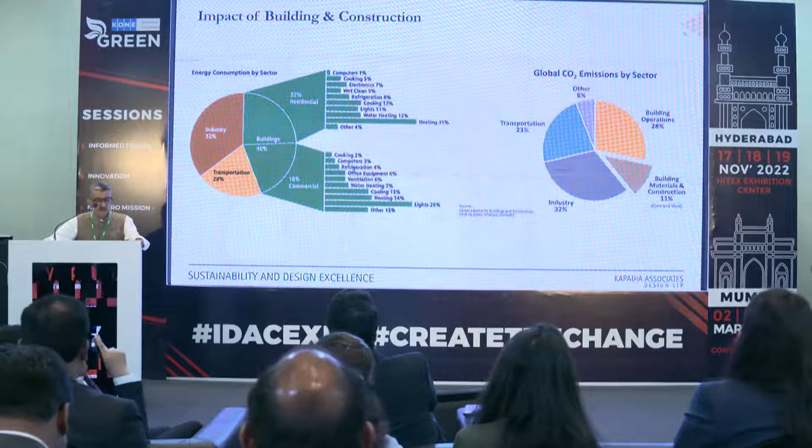The world today is facing broad and complex challenges that threaten every aspect of our lives. As the effects of climate change intensify across the world, the architecture, engineering, and construction industry, AEC as it's popularly called, is getting extremely aware of the looming crisis. Let me start with some statistics. You'll be surprised to know that the building and construction sector is responsible for approximately 40% of energy consumption.

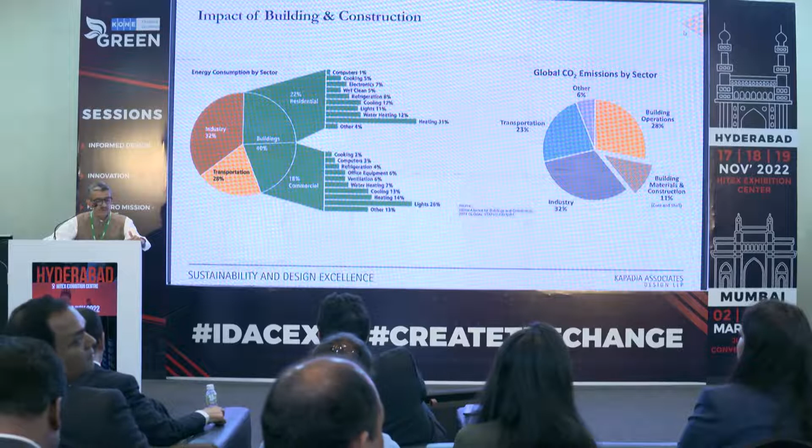39% of energy related carbon emissions, and 50% of resource consumption globally. Over the years these figures are only going to increase, and growing economies like India will contribute significantly to this environmental crisis. Many government organizations and climate conscious bodies are pushing for all new buildings and developments to achieve carbon neutrality by 2040. Architects, engineers, and all agencies involved in the building industry must begin implementing sustainable strategies into their workflows to achieve this goal.

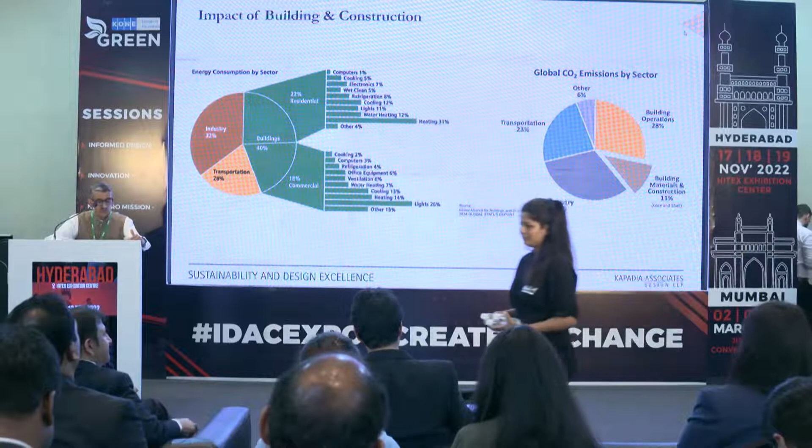There was a time not long ago - I've been practicing now for about 30 years - when the goal of the sustainability movement was to create awareness amongst people that a problem exists. Those days are definitely behind us. Today a majority of the population, and I'm not talking just about architects, the general population, politicians, etc., understand global problems such as climate change, air pollution, exposure to environmental toxins that threaten our future.

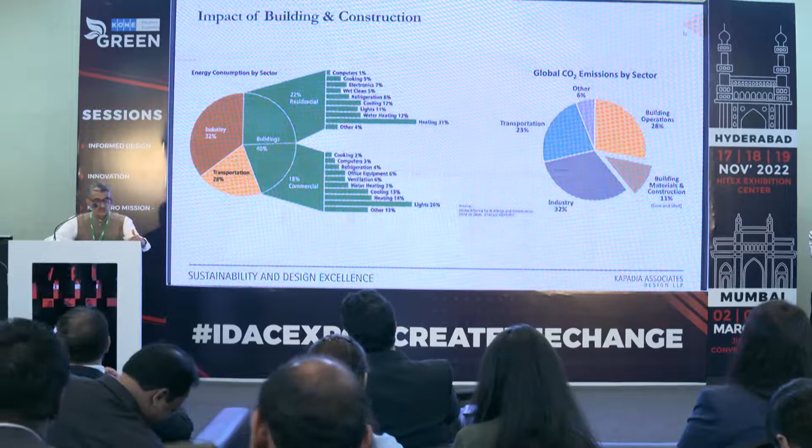Architects also understand that the built environment plays a significant role as both a cause of many problems, and we have to find the solution to the problems we have in a certain way created. More professionals see sustainable design as a major component of good design and want to improve the social, environmental, and long-term economic performance of projects. The problem most architects face is not a lack of concern or intent, but the ability to achieve deeply sustainable projects amongst a myriad of competing priorities.

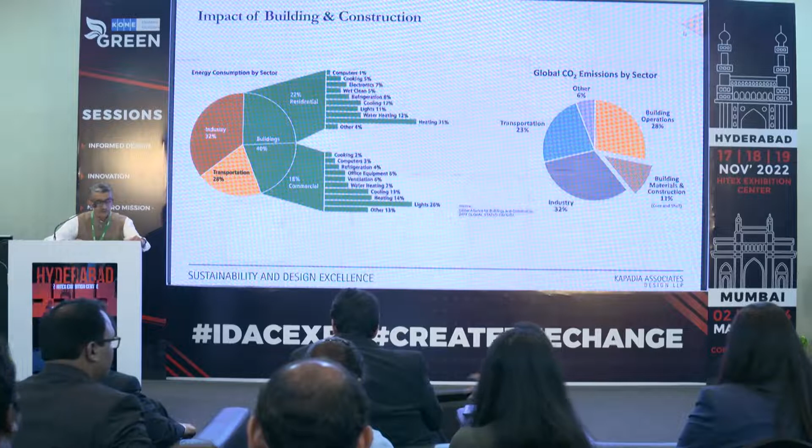High performance buildings are often seen as something available only to a few ambitious projects, which have the right client, the right program, and the right budget. These are showcase projects as I see them, and I want to change the bar here. These high performing buildings are definitely important as examples of what is possible and for pushing the envelope, but they are few and far between. They will not solve the big environmental issues.

Furthermore, the emphasis in our country is to do with rating systems, like what Carl said. Standardized rating systems like USGBC, LEED, GRIHA have a role to play as they streamline sustainability for quick adoption in a project. However, these rating systems do not look at the design process in a holistic manner, and that's my biggest peeve about them. This often results in piecemeal, incremental changes to the design that are invisible to the user in terms of tangible benefits. People are chasing ratings but not really getting or seeing the benefits of it - it's not deeply ingrained. They also add a significant administrative burden to an already overtaxed design administration, which discourages clients from adopting them.

So a lot of buildings where we're doing a lot of the green principles, but clients do not want to go in for a rating purely because the administrative issues of dealing with rating are quite significant, and they don't really want to deal with that.

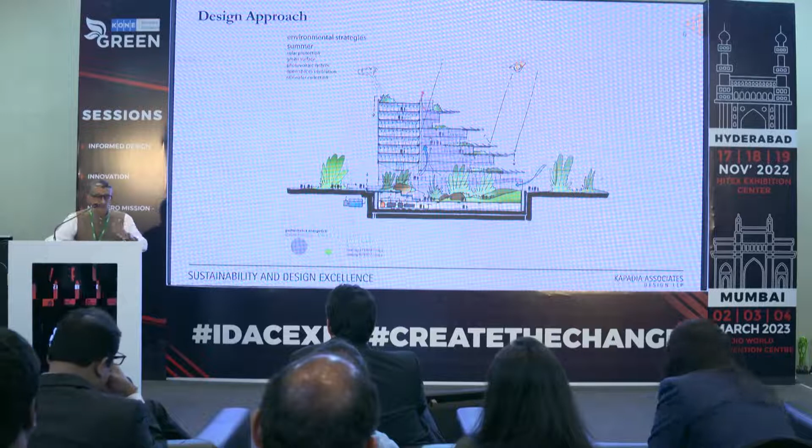For example, one rating system very popular in the West is called WELL, W-E-L-L, which actually looks at the health and well-being of the inhabitants. Rating systems like Griha or LEED don't look at wellness as a very major factor. So all rating systems have their own biases, which they push after. I think what is required here is a more holistic approach.

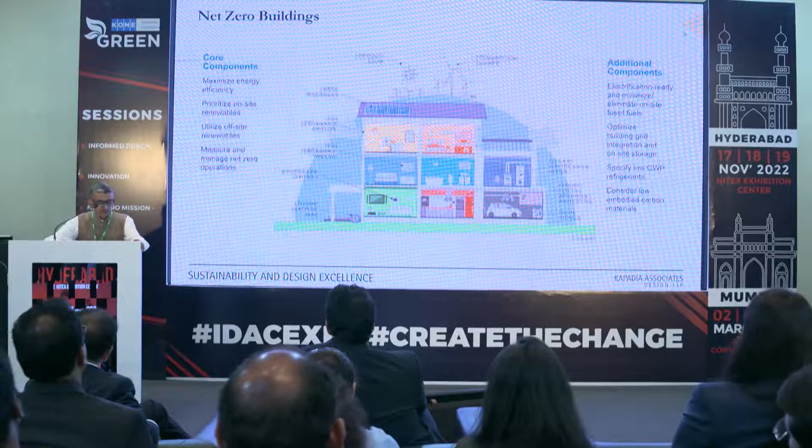And the architect's call to protect health, safety, and the welfare of its occupants has a new and broader meaning amid challenges such as increasing climate extremes and social inequity. Architects must recognize that our profession can harness the power of design to contribute to solutions addressing the most significant needs of our time. Building professionals should look at this as a big opportunity. Every project should be used as a platform for addressing big problems and provide creative solutions.

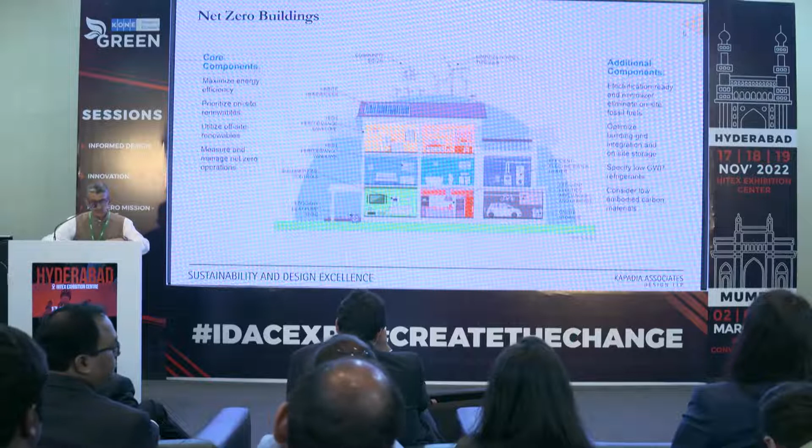I would like to introduce you to a framework for design excellence, which has been developed by international scholars and practitioners. The framework is comprised of 10 defining principles of good design in the 21st century. This framework seeks to inform progress towards a low energy, low carbon, equitable, resilient, and healthy built environment.

As a practice, we have been working with these principles over the last 3 years and have found them immensely helpful. This becomes a checklist for us when we do any kind of project, and I'll run you through each of these 10 principles that should be followed as general rules. These should be thoughtfully considered by the design community at the initiation of every project and incorporated into the design process from an early stage, regardless of the size, typology, or aspiration.

So the 10 are: design for integration, design for equitable communities, design for ecology, design for water, design for economy, design for energy, design for wellness, design for resources, design for change, and design for discovery. I will now briefly discuss each of these principles and focus points that each principle attempts to address.

The first one is design for integration. Good design elevates any project, no matter how small, with a thoughtful process that delivers both aesthetics and functionality in a mature balance. It is the element that binds all the principles together with the big idea. What is the concept or purpose behind the project, the design agenda as I would call it, and how will the priorities with the 9 other principles inform the project?

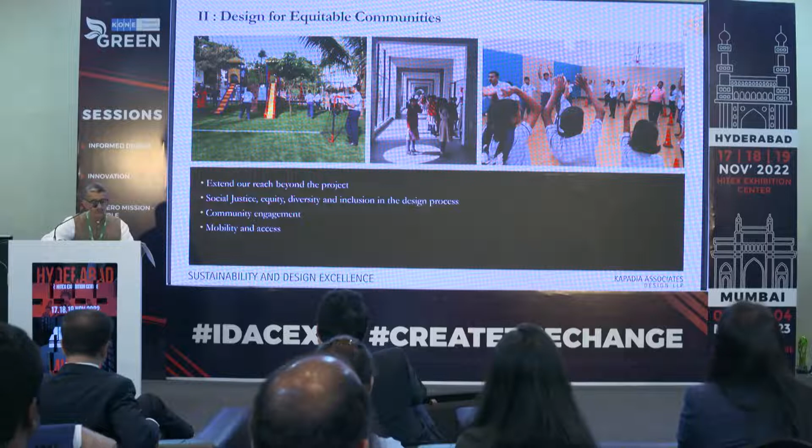The second is design for equitable communities. Design solutions affect more than the client and the final occupants. Good design positively impacts future occupants and the larger community. How can the design process remove barriers and promote inclusion and social equity, particularly with respect to vulnerable communities? What is the project's greater reach? How could this project contribute to create a diverse, accessible, walkable, just, and human-scaled community?

What might this project be forgetting? How can the project design process and outcome remove barriers and promote inclusion and social equity? What opportunities exist in the project to include, engage, and promote human connection? How can the design support health and resilience for the community during times of need and emergencies, as we've seen in the current COVID crisis?

The next principle is design for ecology. Good design mutually benefits humans and non-human inhabitants. How can the design support ecological health of its place over time? How can the design build resilience and support regional habitat restoration? How can the design help users become more aware and connected with regional ecosystems? How is the project supporting regional habitat restoration? This includes designing landscape composed of 100% native planting, especially species that attract pollinators.

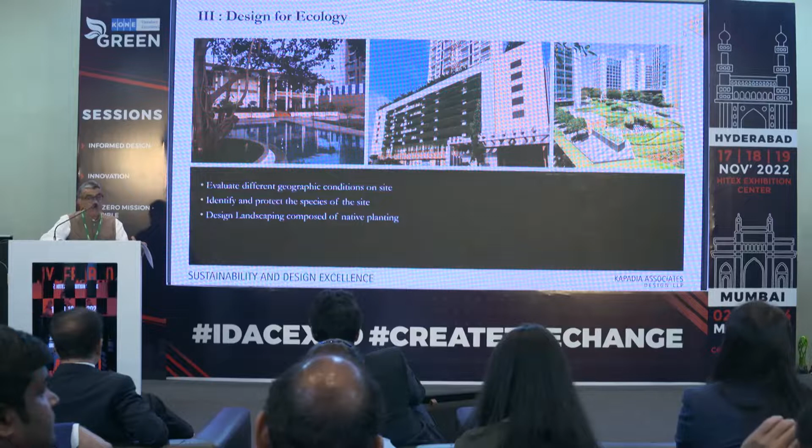The next issue is design for water. Good design conserves water and improves the quality of water as a precious resource. Does the project use water wisely, addressing both efficiency and consumption? How can the project's water systems maintain function during emergencies or disruptions? How does the project handle rainfall and stormwater responsibly? How does a project contribute to a healthy regional watershed? And there should be a sincere attempt to do a net zero water building.

A lot of scholars have said that the next war in the world is going to be fought over water. Water is going to be a precious resource. We're kind of harping a lot on energy, but water is going to be a very, very critical component of what we do.

The next is design for economy. Good design adds value for owners, occupants, and community, regardless of project size and budget. How does the design balance cost and long-term value? How can the performance of the project be improved in ways that are tangible?

Keeping the building footprint as minimal as possible, living within our means, not building more than we need, is very critical. Flexible spaces are very, very critical—spaces that are put to multiple use rather than building more and more.

How will the design balance long-term value with appropriate choice of materials? How can the performance of the project be improved in ways that are cost and design neutral?

Design for energy. Good design reduces energy use and eliminates dependence on fossil fuels while improving building performance, function, comfort, and joy. How can passive design strategies contribute to the project's performance and form?

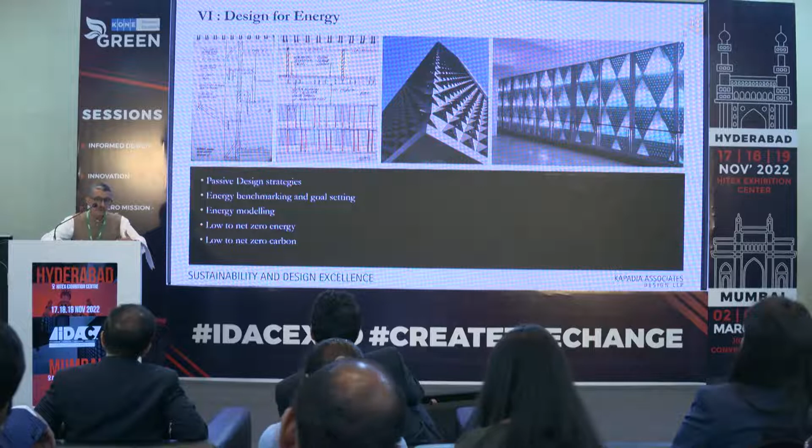There'll be few projects where you'll be able to achieve zero energy and zero carbon. But if in a lot of projects we can achieve low energy and low carbon, at a much larger scale I think we will be much better off, for multiple projects. It's better to do 10 projects with low energy, low carbon, rather than one project with zero energy, zero carbon. That's my take on it.

The next is design for wellness. Good design supports health and well-being of its occupants. This includes physical, mental, and emotional effects on the building's occupants.

How can the design encourage a healthier lifestyle? How can the project provide greater comfort for the occupants? How can the project be welcoming and inclusive? How can the project connect people and nature?

This includes natural daylighting for its occupants, views from the outside, not having dark spaces, and can the material selection reduce hazards to its occupants?

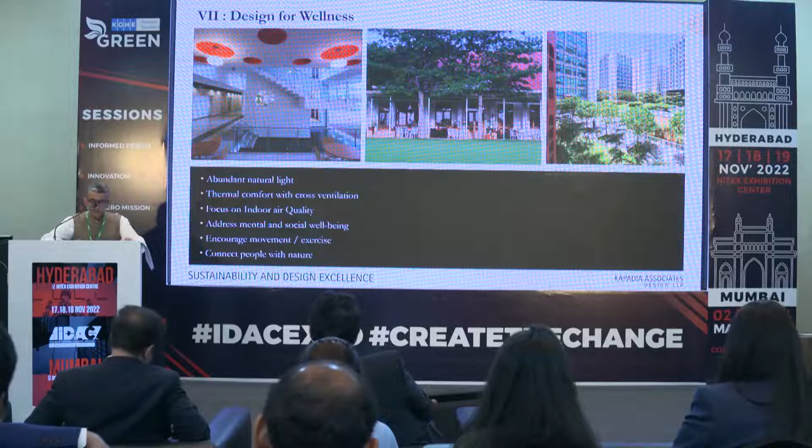The eighth principle is design for resources. Good design depends on informed material selection, balancing priorities to achieve durable, safe, healthy projects with an equitable, sustainable supply chain to minimize possible negative impact.

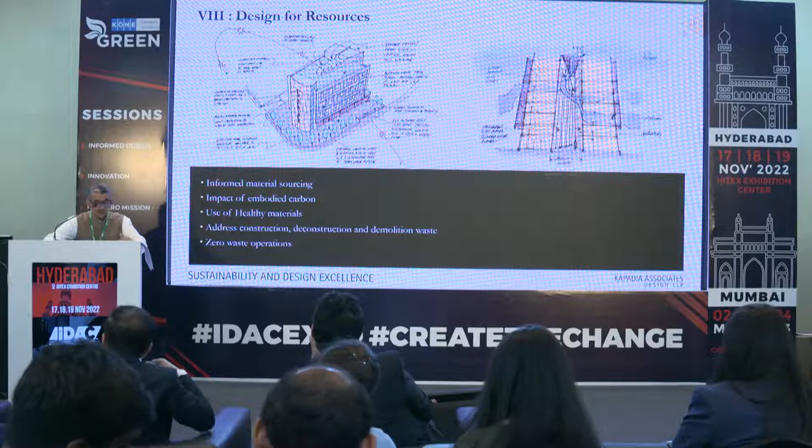What factors will be considered in making material selection decisions? How are materials selected and designed to reduce embodied carbon and environmental impacts while enhancing building performance? How does the project celebrate local materials and craft? How does the project promote zero waste throughout its life cycle?

The ninth principle is design for change. I think adaptability, reuse, and resilience are good to design for. Rather than demolishing and building anew, I think building projects which can be used for other facilities is very good.

Not every project can do that, but one is seeing all over the world where projects are being redesigned for various things—like I've seen a hotel building getting converted to a hospital, etc. So design for change, I think, is important.

How does the project address flexibility and adaptability? This may not be relevant in every project, but I think it's important to keep it at the back of one's mind. And how is the project designed for changing market conditions and future uses?

And the last one is design for discovery. Every project represents a unique opportunity to apply lessons from the past and gather information to refine the design and construction process. How can the design process foster a long-term relationship between designers, users, and operators to ensure design intentions are realized and project performance can improve over time?

How are the lessons learned through construction shared with the project teams? How are the experiential stories of the occupants after the building is finished shared, even when the findings fall short of the original vision? Sharing experiences of how the building behaves post-completion with end users is extremely critical, which we tend to forget.

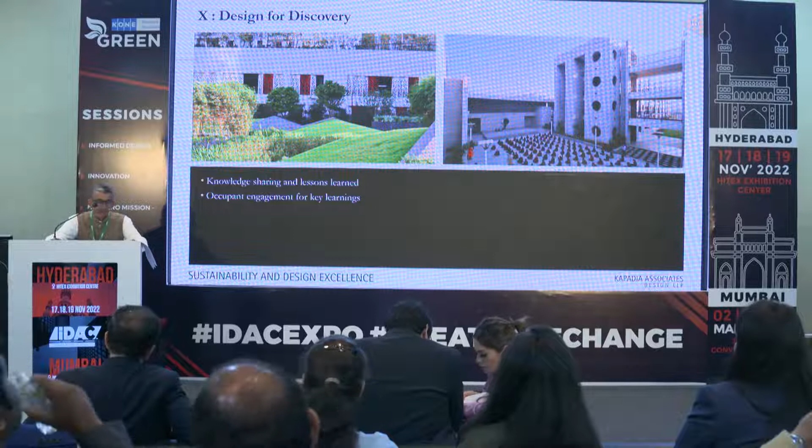So I come back to these 10 principles, and I sincerely hope that this framework harnesses the power of design in a holistic manner to contribute to solutions addressing the issue of sustainability comprehensively.

The framework for design excellence, as it is called, challenges architects with a vision of what the profession strives to achieve. This framework is designed to provide relevant issues and questions to architects to incorporate deep green principles in every project and hopefully design high-performing, equitable, and beautiful buildings.

I'd like to end with a quote from Albert Einstein: 'The world will not evolve past its current state of crisis by using the same thinking that created the situation.' Thank you and have a great evening.